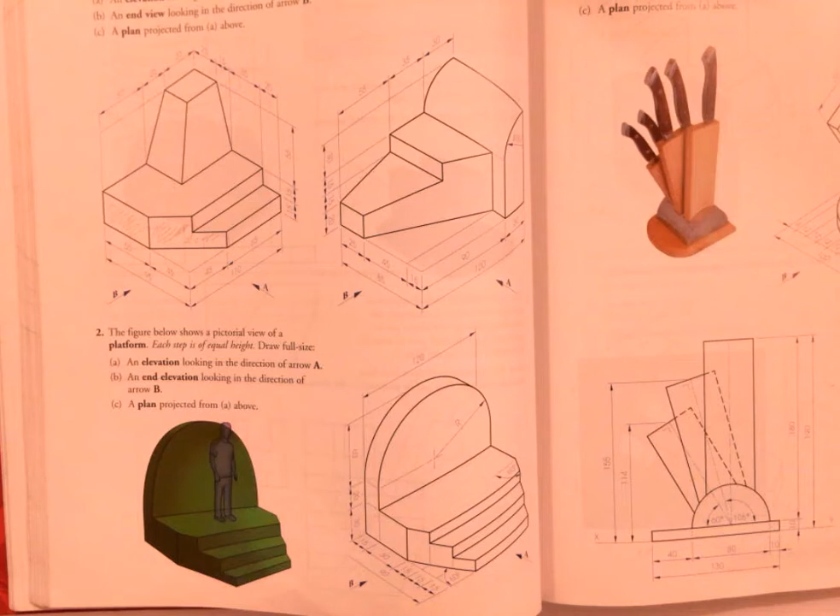Okay, we're on page 122, question 2 of the book. Let's zoom in on it for a second. It says the figure shows a pictorial view of a platform. Each step is of equal height. Draw full size elevation looking in the direction of arrow A.

So our front elevation is in the direction of arrow A. We've got a plan that we're going to project from on top of that, and we have to do an end view looking in the direction of arrow B. We're looking in from the left, which means we're going to be drawing it on the right hand side. So I'll have elevation on the left, end view on the right hand side.

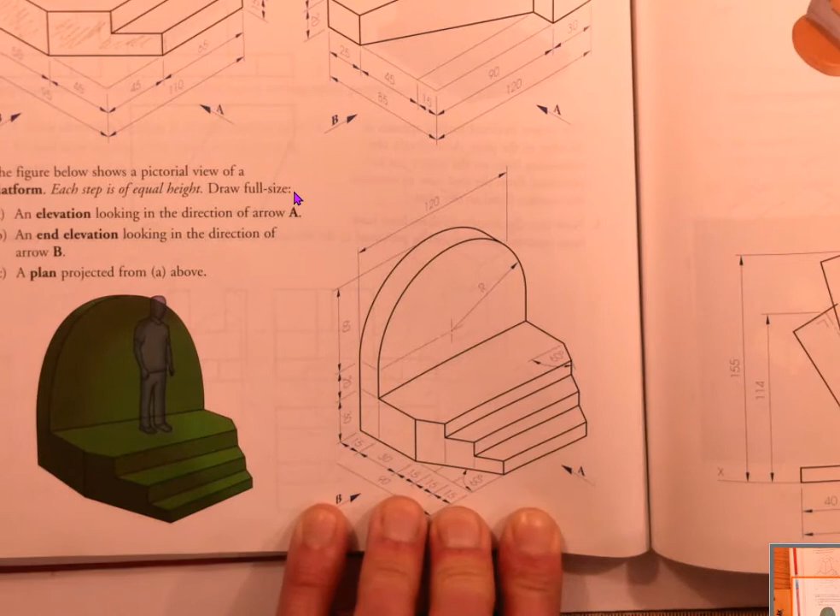The whole height of the base is 30 millimeters, so that means I'm going to have 3 steps, 10 millimeters high. Now I want to set out my overall width and height for the elevation. Width of the elevation is 120, height 30, 20 and 60, which is 110 millimeters. So I'm going to set out a box for my elevation, 110 high, 120 wide.

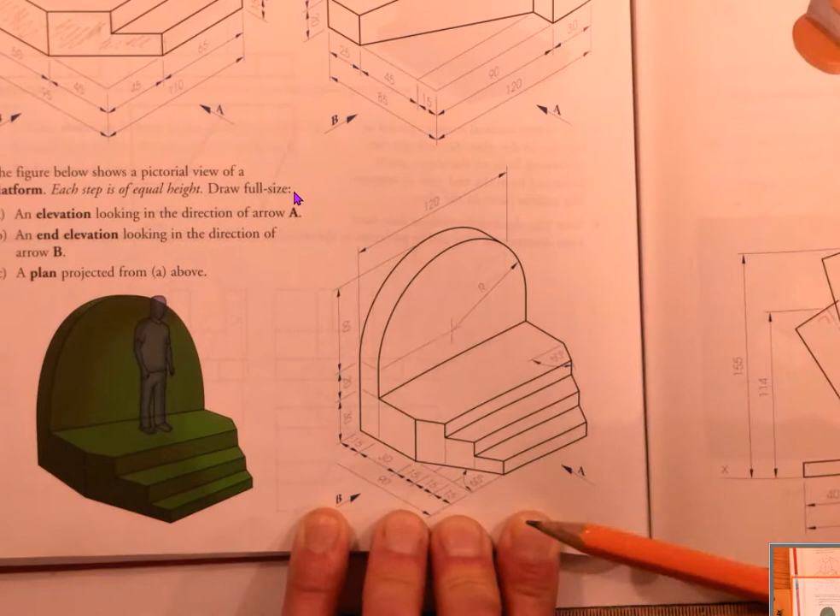I'll step down 20 in the plan, and my plan from back to front is 90. So the plan is going to be back to front 90 millimeters. I've that already done on the drawing.

So I'll zoom back out and we get to the actual drawing itself. I've got my elevation and plan laid out here. Box 120 wide, 110 high, and I've got my plan 90 in plan.

So step down 20, 90 millimeters for the plan. Now I was given 3 heights in the elevation. The first height was up 30 millimeters. That's for the height of the step, and then it's up 10, 20 for the curve.

I'm going to put a construction line across for the curve, and we want to draw that in. So the curve is 60, 120. In other words, it's a semicircle.

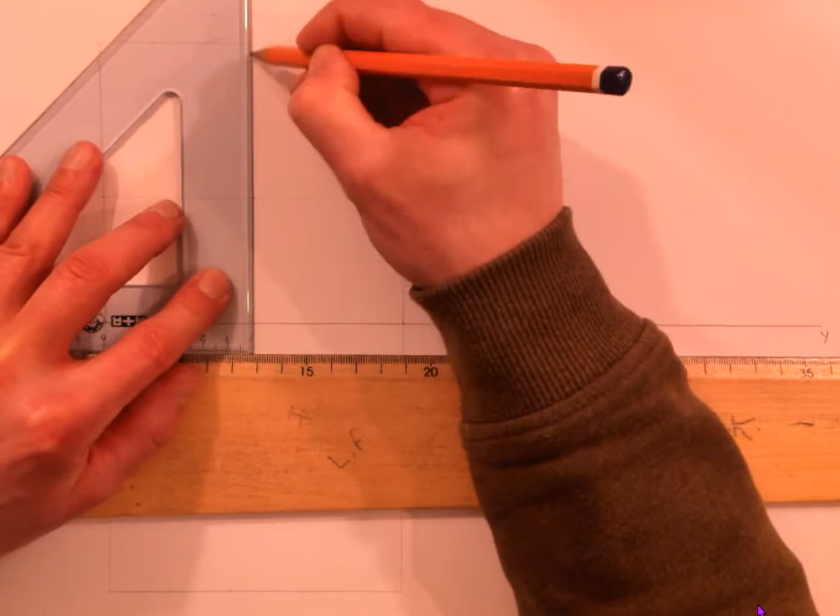I'm going to come in and get the center for the curve. So I stepped in 60 mil, but very importantly, I'm going to find the point on the top. I need that curve to hit the left, top and right. So before I draw it, I'll go and check that.

So I've got my center point on the curve. I'm checking it touches there pretty well, it touches up there pretty well, and touches the far side a little bit long. So I'm going to move my center point slightly. Go back and check them again. It touches the top, hits the side. That's better.

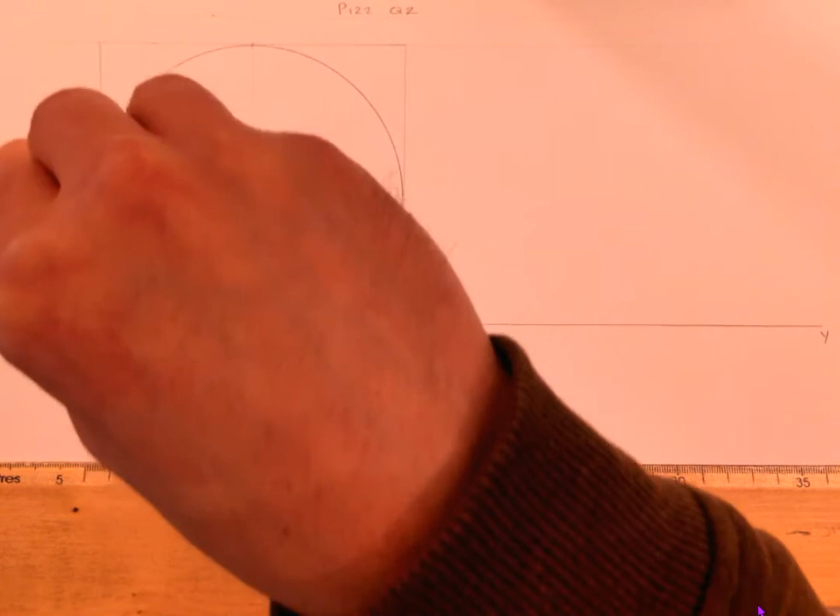So I'll draw in my circle. I'm drawing the circle in the elevation because that is the view where I see it as a circle. So this is where I'm starting.

The top of the step is 30 millimeters high, so the step is 30 mil high. And I'll actually darken that much in. That's basically the outline of the elevation drawing.

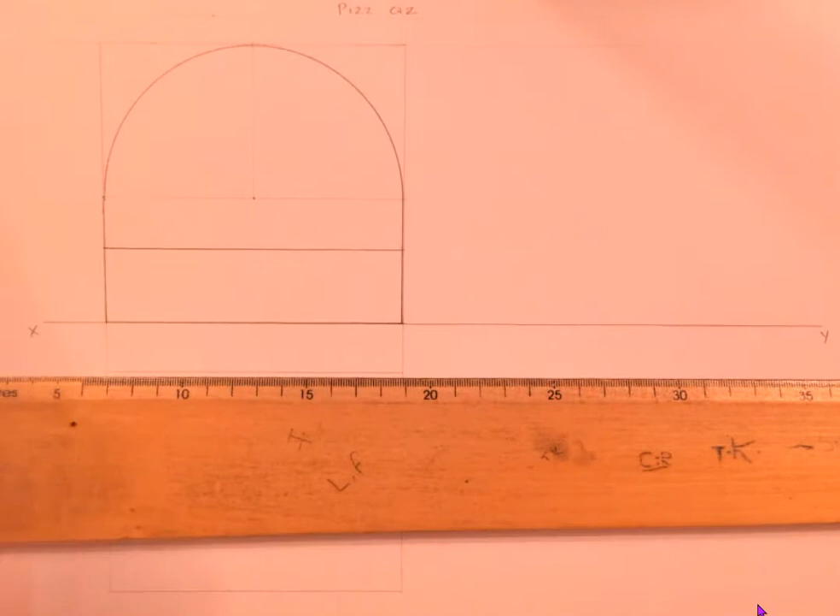So I've got my outline of the elevation. The steps, it said, were all 10 millimeters high, so I'm going to go 10, 10, 10, and I'm going to put in the position of the steps. And that's that done.

So that's about as much as I can really draw on the elevation, because straight away I've hit a problem. When I come back to the question, I look, there's no measurement for any of these steps, meaning I can't draw them in the elevation. So I'm going to have to turn to the plan and draw them in plan.

In plan, I've got a 15 millimeter measurement, a 30, and then 3 15s. So I'm going to set those out: 15, 30, 15, 15, 15 in plan. So I'll start from the back of the plan: 15, then 30, and then I've got 15, 15, and 15.

The first measurement, the 15, is the curve. So that's this curve in elevation, is this section in plan. So I can draw that in.

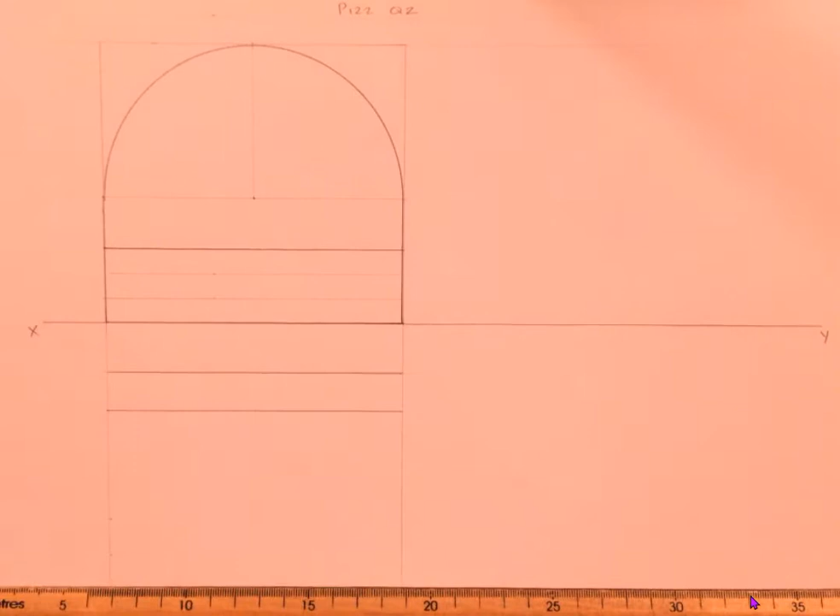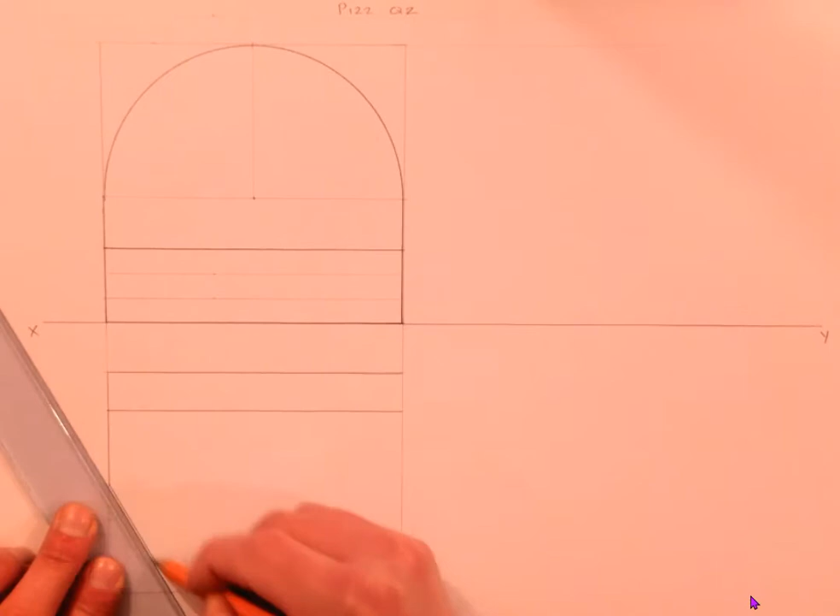The side of the outline comes down as far as, here we go, it comes down to the 30 millimeter measurement. So there's my 30, and it comes off at a 60 degree angle. So it said the angle of this is 60 degrees. So I've stepped 15, I've stepped down 30, and I've come off at a 60 degree angle.

Same the far side. I'm going to put my point across. I'm going to take this point, put it across here, and I'll do the same on the far side. So 60 degrees this way with the set square.

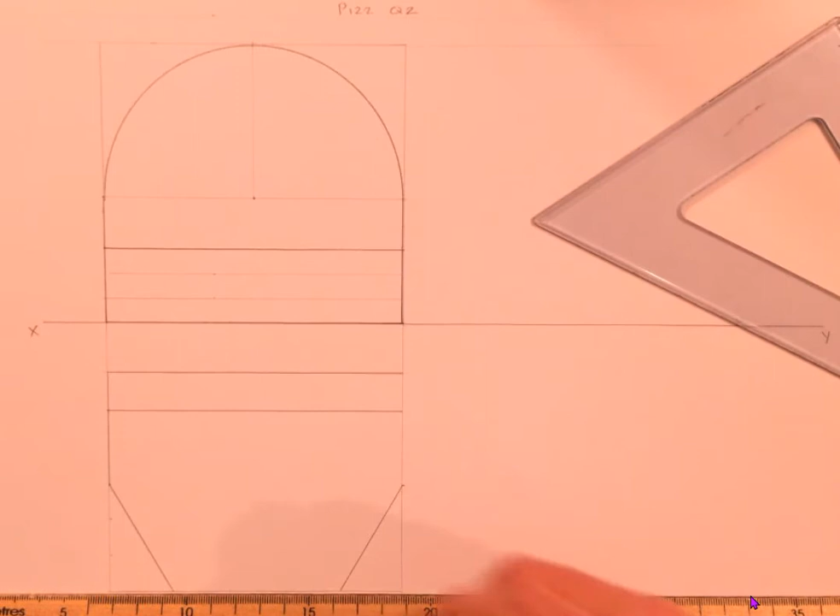So again, I've got the outline of the plan drawn in. It said each step is 15 millimeters, so that's where the 15s come in. So the steps are all 15 millimeter sections. I'll go find those.

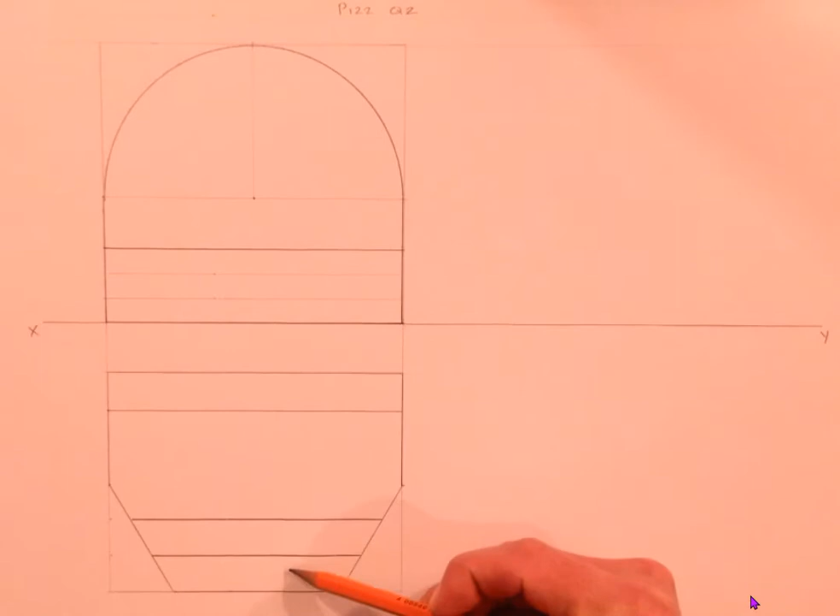First step up 15, so I can draw my line in here. Next step up 15, I can draw my line in here. And so that is my first step, second step, third step drawn in. And where that comes in important is that now I've got the points on the steps, so I can see where I need to draw those steps.

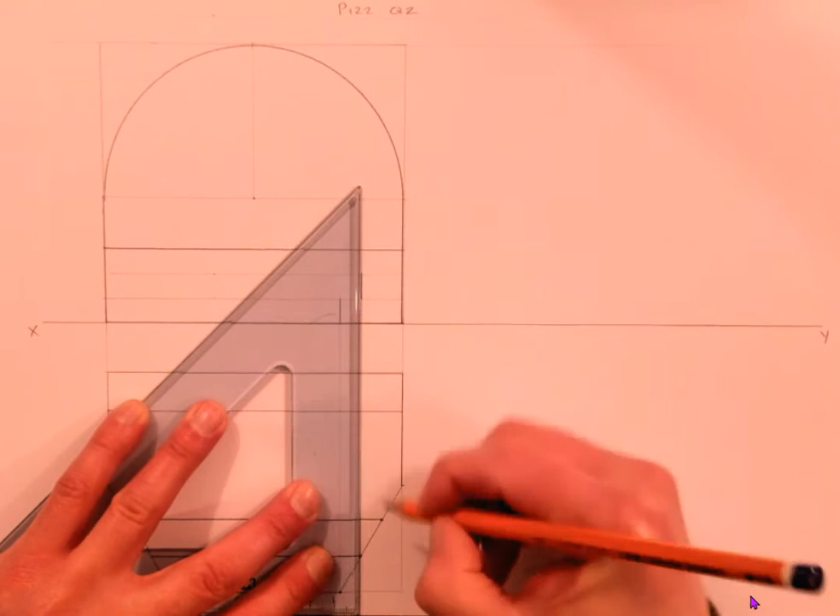I can take those up to elevation. Take my point up, gives me my first line. Point up gives me the middle line. Point up gives me my third line. So those are my 3 lines.

This is why we have to connect the views together. You can't do this without connecting the views together. You'd be making up measurements. That is absolutely not allowed.

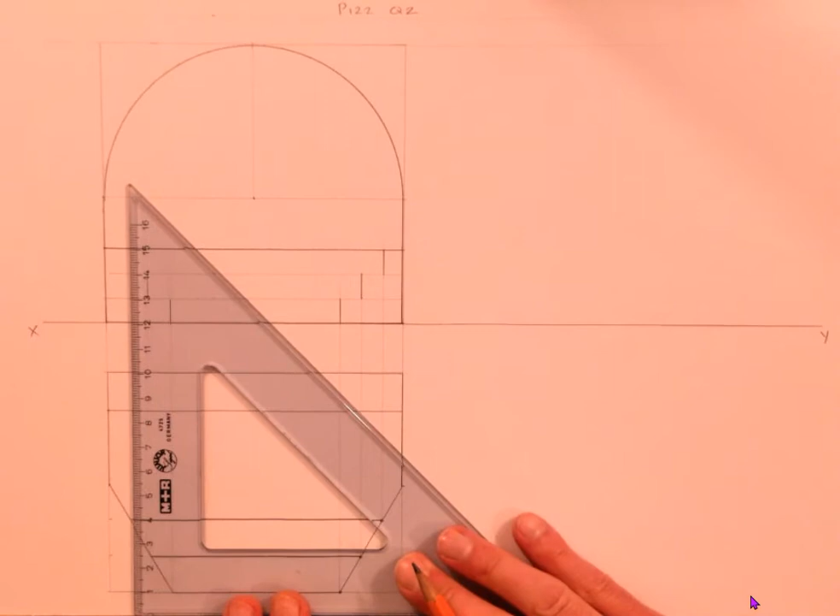First step, take my next point up for the second step. Third step. And so now I've got my steps in either side, and I can darken in my lines. Elevation and plan is done at that stage. So I've got everything in that I need for the elevation and plan.

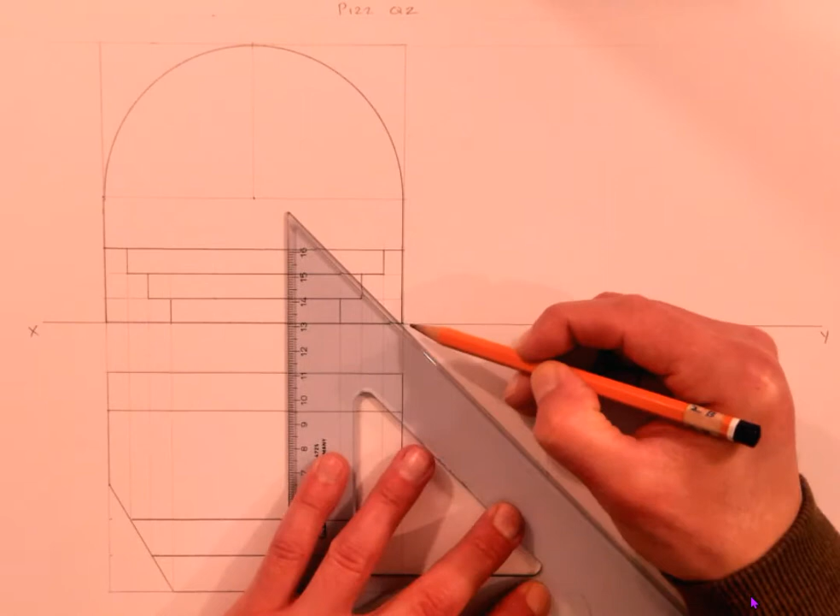It's a matter of drawing the end elevation now. Same thing for the end elevation as we've always done. Where the elevation and plan cut the XY line, I'll put in my line. And again, I'm drawing it dark, you draw it light. I'm only putting it in dark so that you can see what I'm doing.

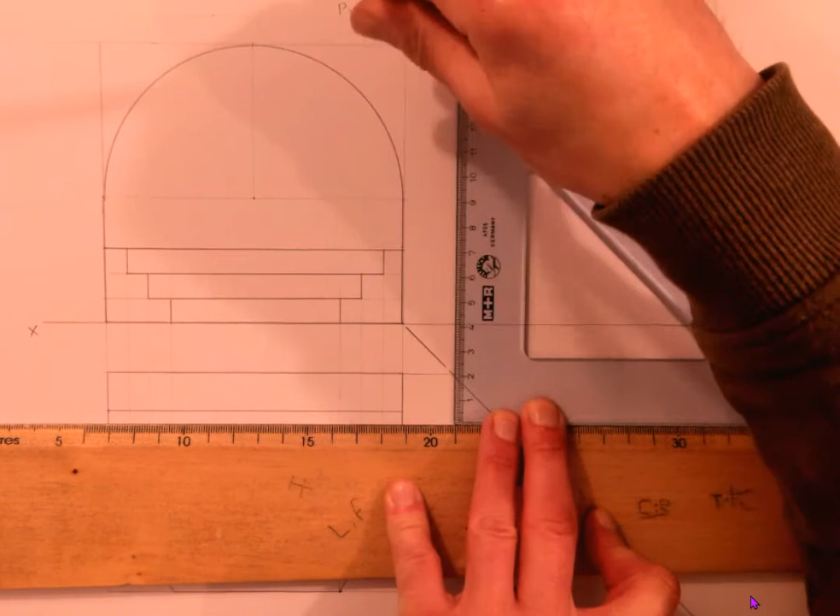I'm going to take my points across. So I'm going to take the back of the object first. Here's the back of the object. Bring it across to the line and up will give me the back of my end view. So that's where the back of the end view is.

I'm going to take the front of the end view here, again across to my line, and bring it up to elevation. I'm not going to bring that up fully because it's only the front step, which is 10 millimeters high. We'll get to that in a couple of minutes.

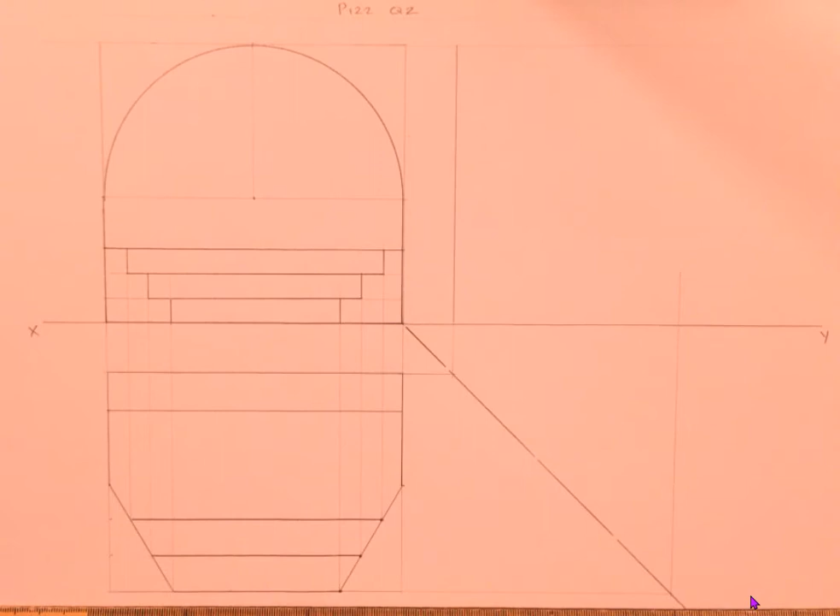I'll draw in the curve in end view. I've got the curve in elevation. Here's my curve in plan. I'll draw it in the end view. So I'll bring that over and up. And that's giving me the position of the curved section.

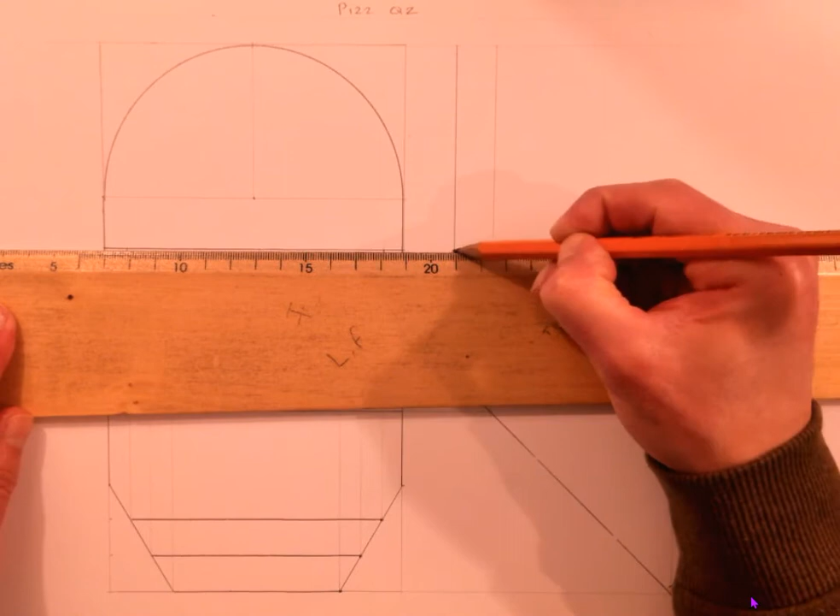The curved section, or the back section, comes down, and then it's got the 20 millimeters of straight stuff. But it comes all the way down to the steps. So when I come along, that piece is coming all the way down to here.

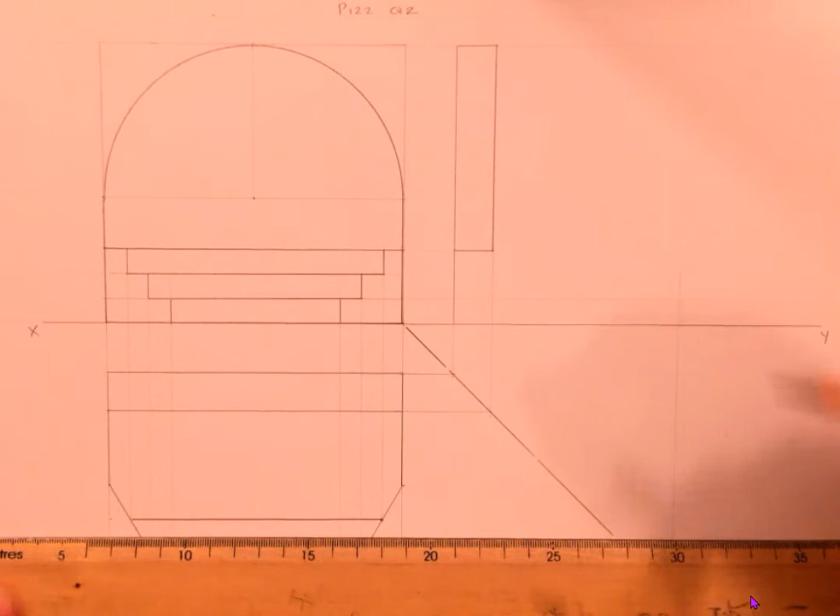All that's left for me to do now is draw in the shape of the actual steps themselves. And I'm going to build the steps from the front up. So the front step is here, it came over and up, and I know that the first step is 10 mil high. So I come along, straight up, and it gives me the 10 millimeter high section.

I need to figure out where that step is going to finish. It's the second line. So I took up the first line, second line now, across and up. So this is the position of the second step. And what it gives me is the start of the second step coming up here.

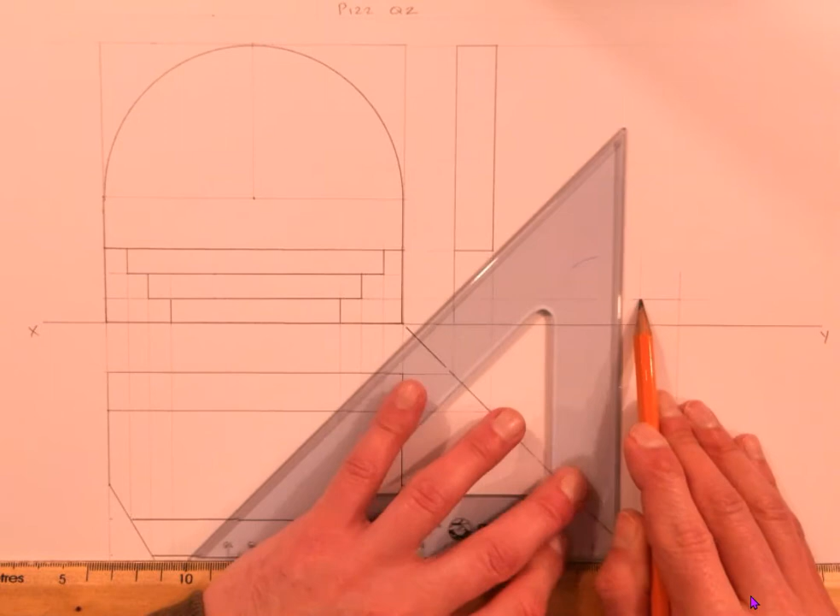And again, that step is 10 high. So the second step here, it is in elevation. It's the second line I bring across. So at that stage, and I'll darken it in so it makes a little bit of sense, I've got my first step drawn in, and I've got the front surface of the second step, and it's coming back here.

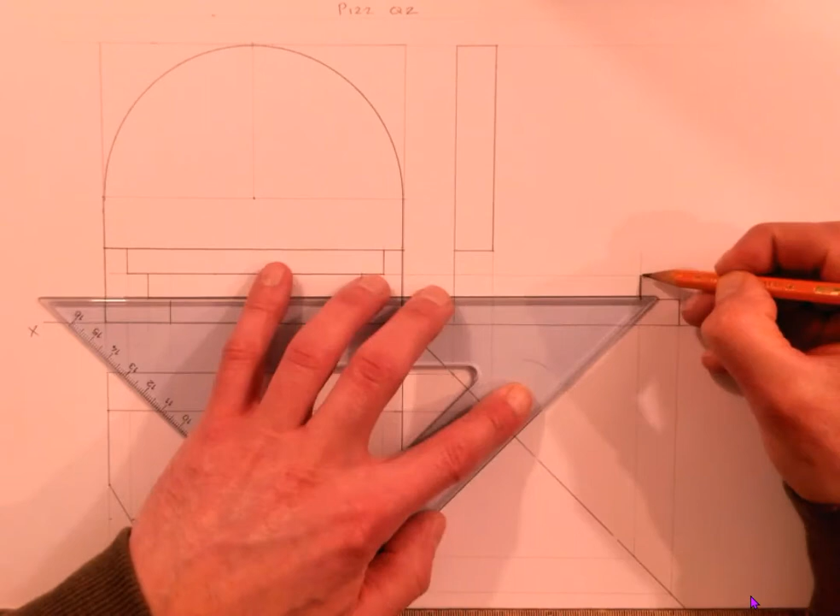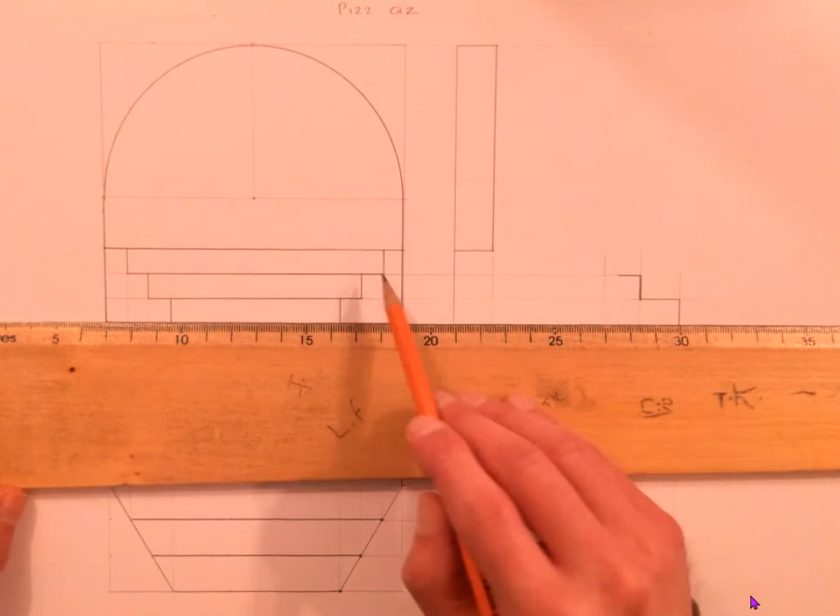I need to find out how far it comes back. So I get my first, second, my third line is here. That comes up, and again it comes up. So I'm getting the shape now of the third step, and again I need to find the height of it. Third step was 30 mil high, which is here, and that gives me the full set of steps done.

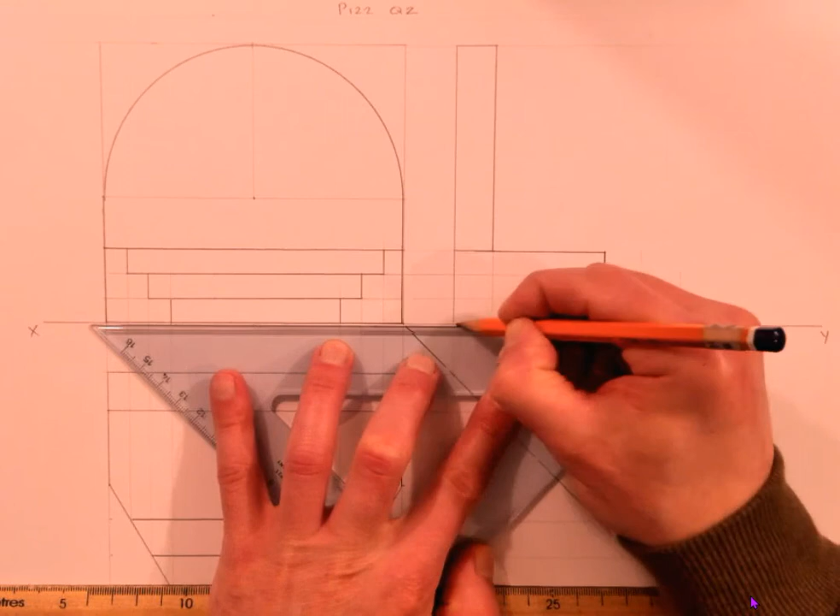Three steps are in. Last thing I need to put in is where my side starts turning off at 60 degrees. In other words, in my end view, I've drawn in all of this section, I've drawn in all of this. I need to get this joint line. So that joint line, where it turns into the 60 degree angle, I need to find.

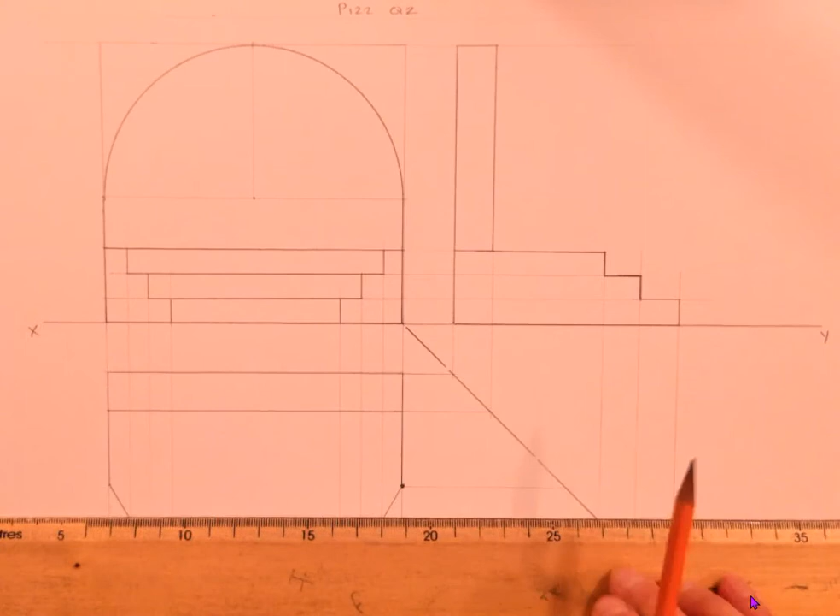And that joint line is here in the plan. So it goes from straight to the 60 degree angle. So again, I bring that across and up, and there is my end view complete. That's my finished elevation plan and end view.